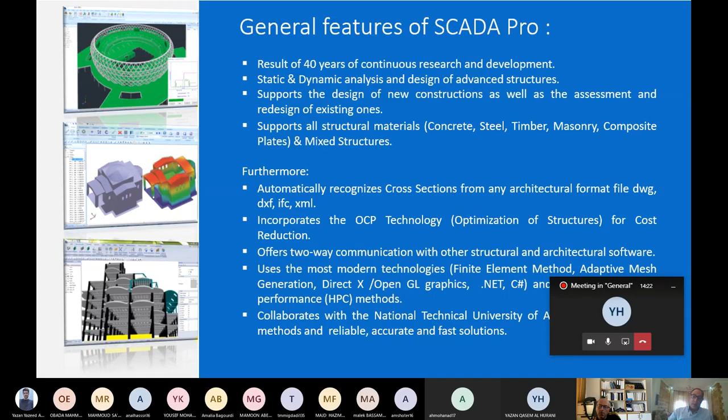It works with DWG and DXF files, incorporates OCP optimization for structure cost reductions, and offers two-way communication with other architectural software using the most modern technologies. Our software has a collaboration with the National Technical University of Athens to create new methods and reliable, accurate, and fast solutions.

Also, it has interoperability with leading applications and standard file types. SCADA Pro integrates BIM technology with two-way communication with any architectural and structural programs.

As you see, Autodesk Revit, ArchiCAD, and programs like AutoCAD, ArchLine, and Arcadia are architecture softwares. Idea Statica is software for steel connection design. As you know, also the structural programs ETABS and SAP.

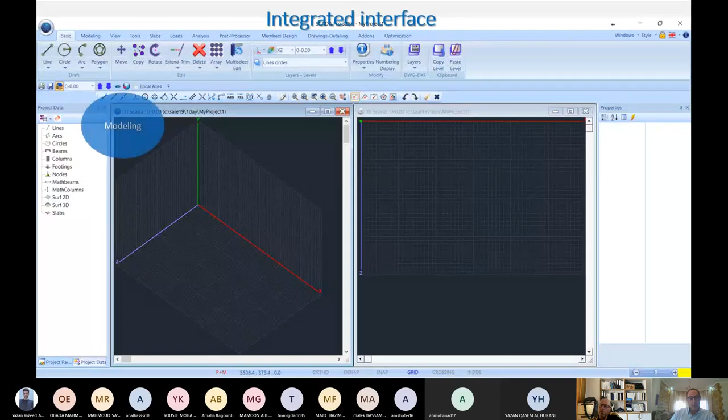You see here, this is the interface of SCADA Pro when you open it. It has different steps that we're going to use to start.

We're going to start from modeling. You can model your structures, your foundations, the elements. You're going to see the loads, static loads, dynamic loads, using different regulations, Eurocodes or each country's regulations and annexations. It also has the Saudi building code. You can do the analysis, which automatically calculates the combinations.

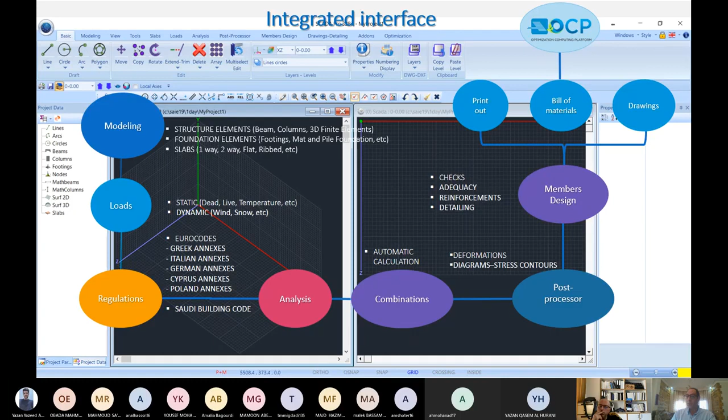In the post-process, we're going to see the deformations and the structural stresses and others. And also in the member design, we'll do the checks, reinforcement, and detailing in the output. You can make the drawings, the bill of materials, and the printouts, and finally we can do the optimization of the structure. It also has an advanced interface.

You can create multiple windows in your interface when you open the program, and these multiple interfaces can give you a direct display of the model on screen, checks, and also give you display and edit of data with tables in front of you.

It also has a powerful graphic library with high resolution virtual display. You can see the whole structure that you have modeled.

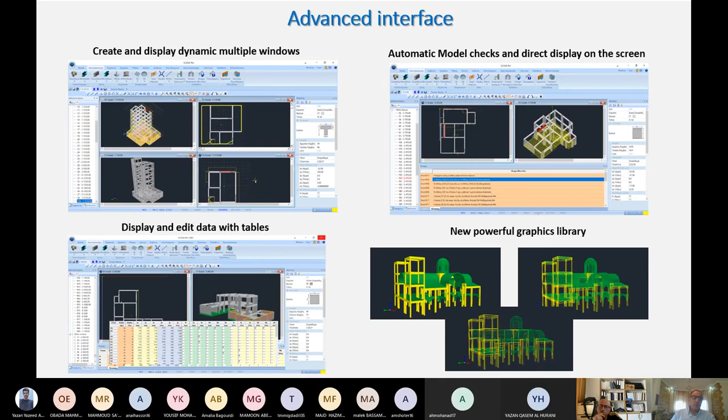Also, SCADA Pro is a multilingual environment which contains 8 languages, which also does the analysis and checks with each country's regulations and annexations, and also provides printouts for the respective languages. It also integrates the Arab regulations, Saudi building codes for concrete, steel, and masonry buildings.

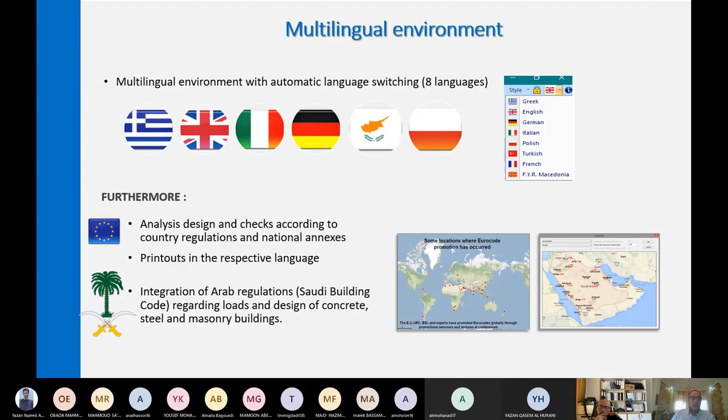Let's see what SCADA Pro enables the user to do and how it makes your life more convenient in the workspace. As we said, it recognizes cross sections for any architectural design, 2D or 3D DXF files.

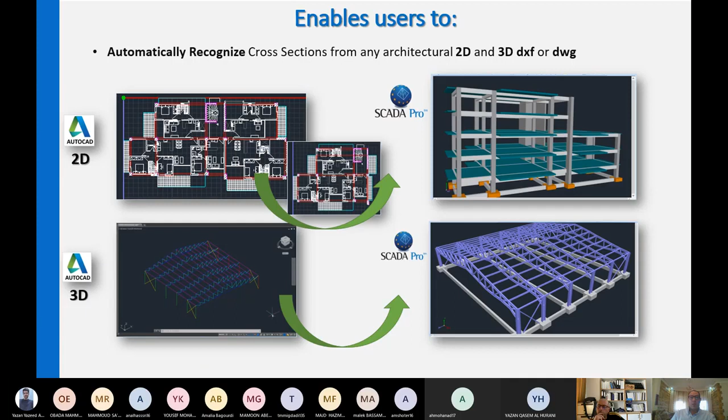We can see here, for example, from AutoCAD a 2D file, you can import it into SCADA Pro manually, or you can import it automatically, which will recognize all the cross sections of the plan and the structure, and will make the models automatically. Also in SCADA Pro, you can see in the 3D view, it will recognize any lines. You can insert it automatically just to apply the cross sections and make the final model of the structure.

It also enables users to automatically convert lines, arcs, and circles into corresponding design objects in SCADA Pro. It automatically creates 3D objects from the outlines of any shapes through front view identification, which helps you create any structure you want.

It also enables bi-directional communication between ETABS and SAP with SCADA Pro. We can import and export concrete, steel, timber, and masonry with the loads and the analysis.

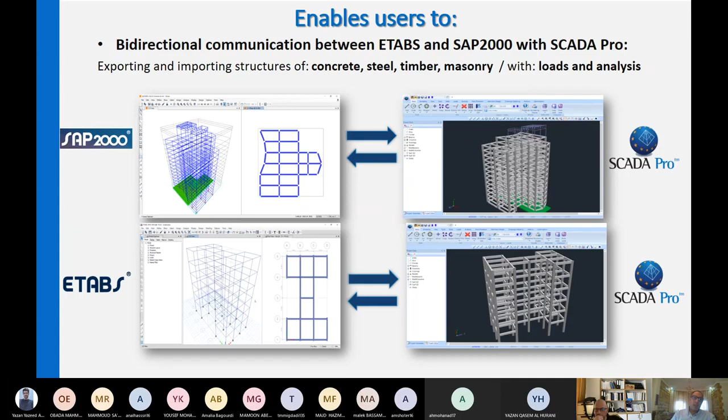For example, here we have a project from SAP, which uses American codes. You can import it into SCADA Pro to use Eurocodes and do the modeling and design of the whole structure. Or you can model and design the structure in SCADA Pro, which has the simplicity and other capabilities, and just do the analysis for American codes in ETABS.

Also, we have bidirectional communication with architectural applications. You can import files from Revit and IFC files from our client that provide accurate data, allowing automatic identification of all components in SCADA Pro, columns, beams, slabs, etc., with their respective properties in order to create the model for analysis and design.

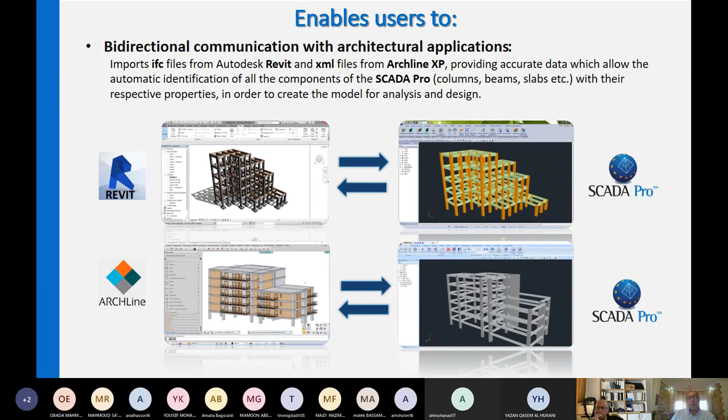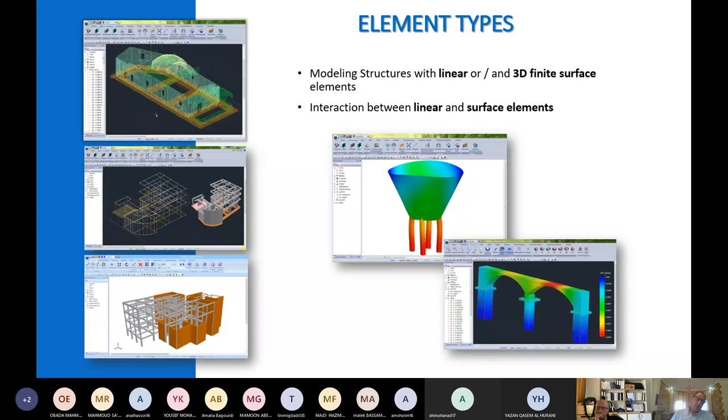Also, we have different elements that the software uses, so you can model structures with linear and 3D finite elements, with interaction also between linear and surface elements. So you have many capabilities in the software.

Also, the types of analysis the software does: we have static analysis, linear static analysis, linear dynamic analysis, and pushover analysis. The professor will explain to you what pushover analysis is. We also have linear time history analysis and non-linear time history analysis according to the Eurocode and Saudi building code.

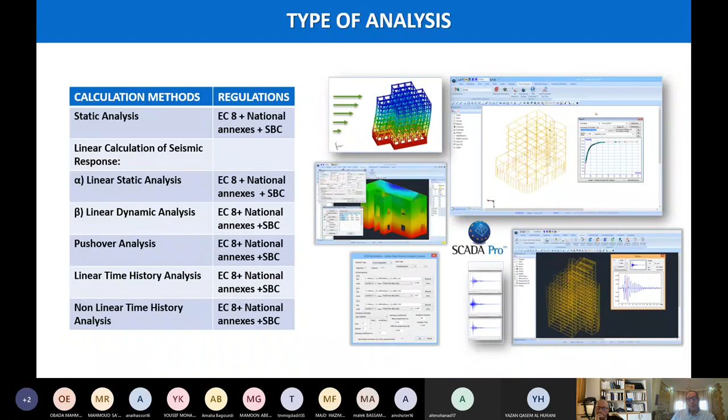Type of materials that you use, we're going to start from materials, starting with concrete. SCADA Pro offers a rich library of standard and arbitrary cross sections, infinite modeling capabilities for beams and columns with arbitrary sections, slabs of any shape and type.

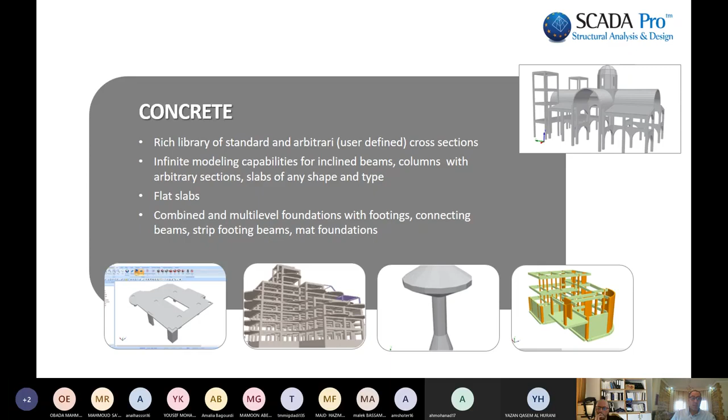Also, you can do flat slabs combined in multi-level foundations with footings, connecting beams, strip footing beams, and mat foundations. So also here, the simplicity of the...

Software gives you unique features, so you can automate the software. It automatically recognizes the thickness of the slabs and automatically designs the whole structure members and displays it.

It also will give you failed design checks, so you can know where the failure is and what is the cause of the failure, and will display the strength ratio in other colors.

For example, for beams, you can see this: we have failure shown in red, pink we have serviceability failure. You can alter that, and in green you can see there's no failure.

Also you can see different indications showing you for the slabs and for the footings. Also among the unique features in design is a powerful reinforcement editor for editing, modification, and 3D display of layers of the reinforcement.

So you can do the reinforcement, automatic bending, shear checking, and moment resistance, with the calculation of moment resistance by the M-N diagrams. So you can do all these, alter them and change them, and see them in 3D view.

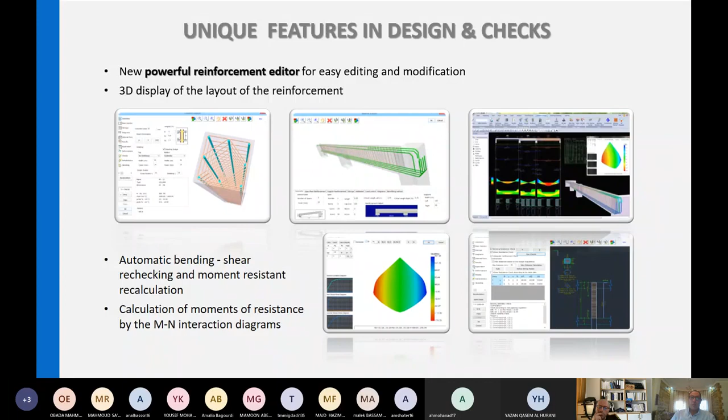And change and alter them, which will make your life simpler to edit and change these things.

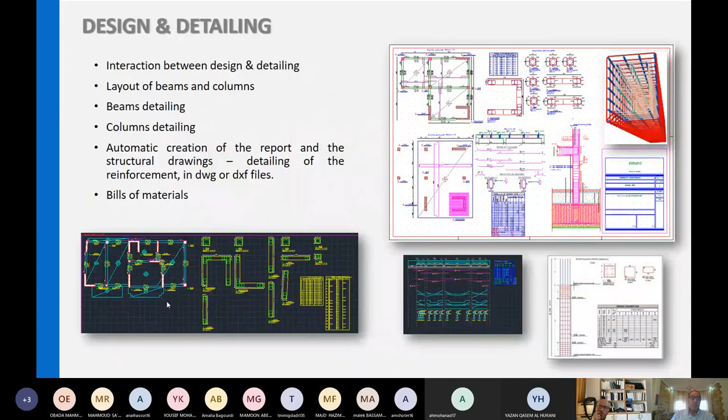Also in design details, it gives layouts of the beams, the columns, beam detailing, column detailing. Also you can create a report for structural drawings and detailing and reinforcements into a DWG file, and it will also give you the bill of materials.

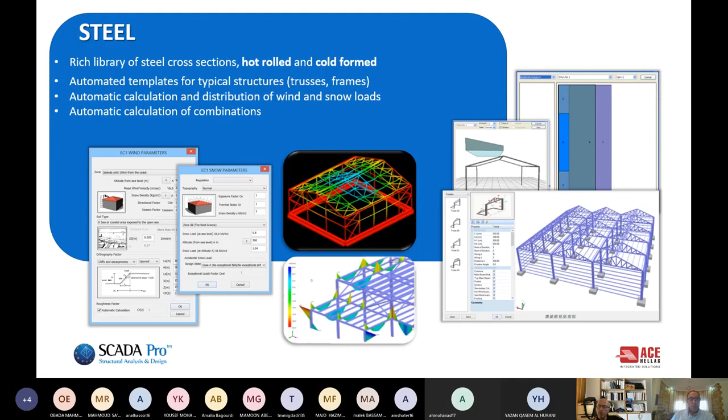For steel, we have a rich library for steel connections, steel sections, hot rolled and cold form, with automatic templates for different typical structures, and it automatically calculates and distributes wind loads and snow loads, and automatically calculates the combinations.

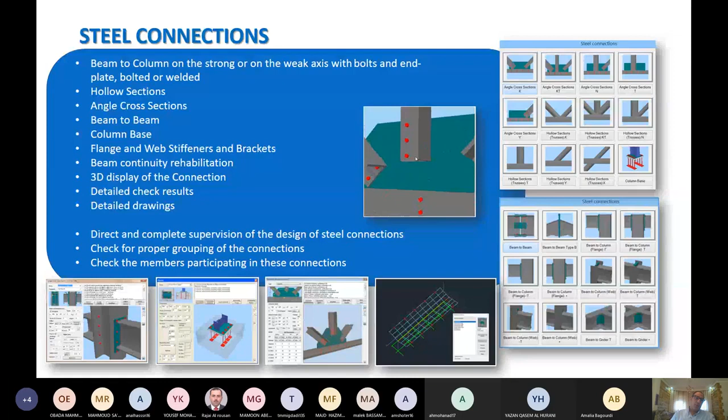You can also see here design checks for the steel member connections, checking structure members for bending, torsion, buckling, all necessary checks for ultimate and serviceability limits, and analysis and design of composite structures, and design for all types of structures.

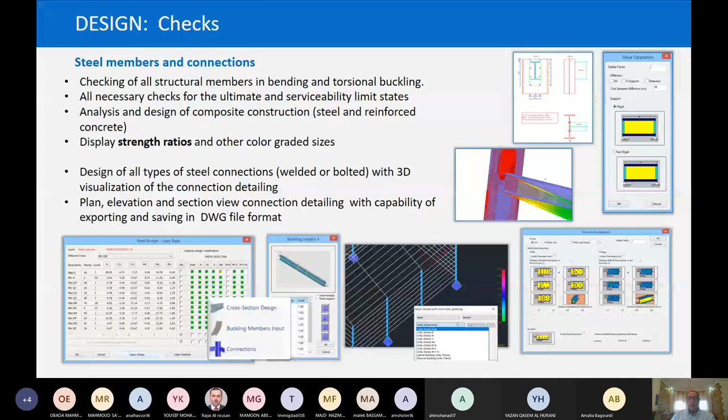And all these you can plan, elevation and section view, with connecting details and the capability of exporting and saving it to a DWG file format.

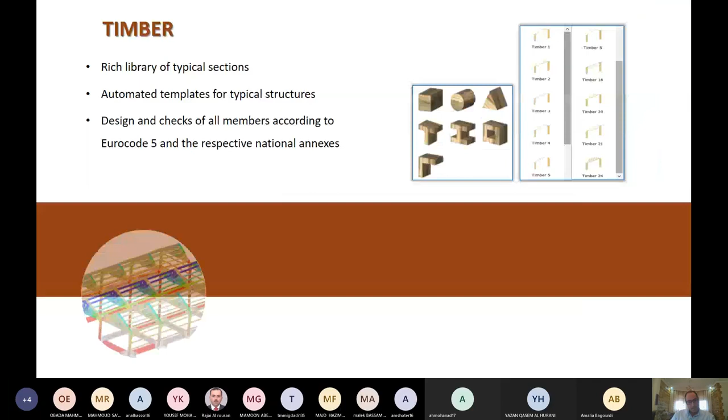Also, we have cold-formed steel sections. Also, for timber, a rich library of typical sections and automated templates, and design checks for all members according to Eurocode 5 and respective national annexes.

Also, timber connections, typical timber connections, and it does the checks for the timber members and connections according to Eurocode 5.

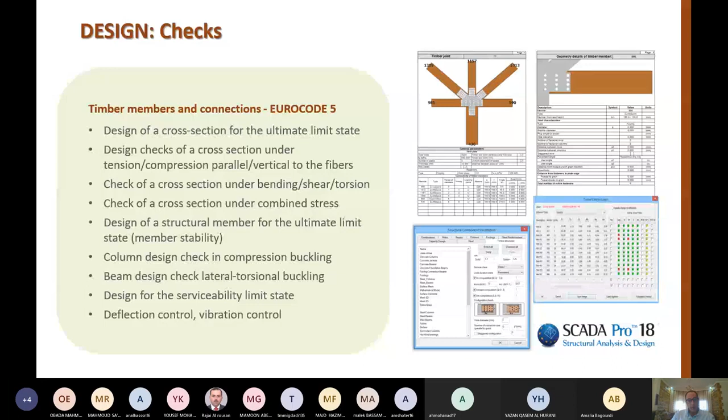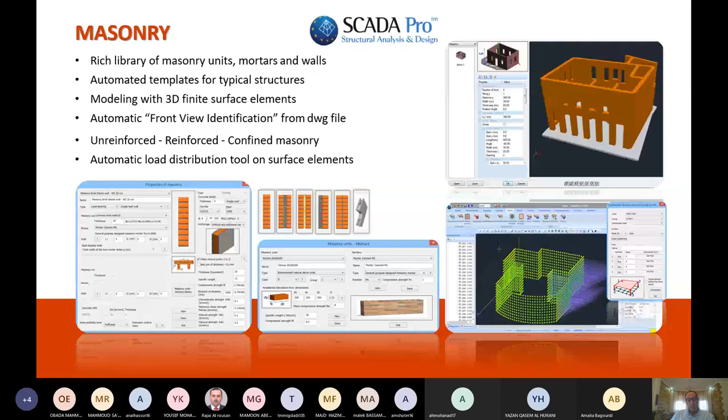Also, we have masonry, a rich library of masonry units, mortars and walls, and automated templates for typical structures, which you can do with 3D finite surface elements, and automatic front view identification from the DWG file. It will also do automatic loads and distribution of forces on the surfaces of these elements, and do the design checks for piers and spandrels of the masonry wall according to Eurocode 6.

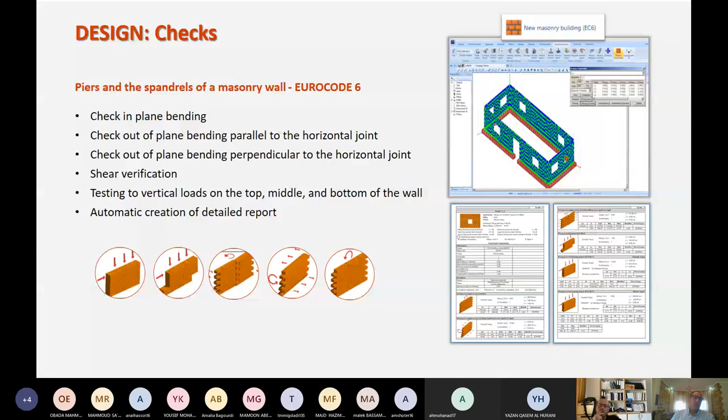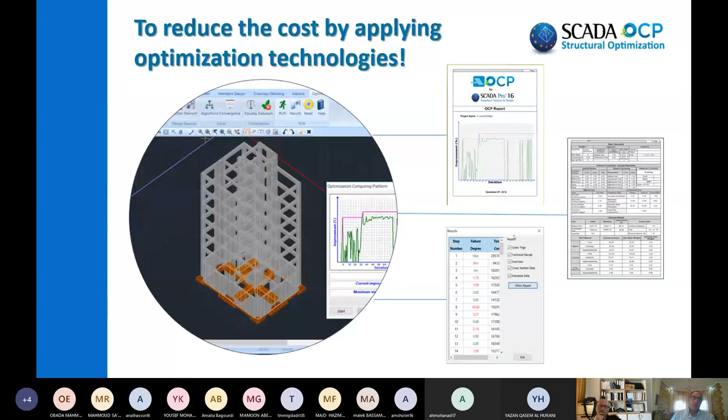And here finally we have the SCADA Pro OCP structural optimization module. It's a module to reduce cost by applying optimization technology.

It's an OCP computing platform that applies optimization theory to real structures, with the ultimate goal to minimize construction costs from materials and labor. This will help you reduce your cost from 10 to 25% in any project, and according with the regulations and codes you're using.

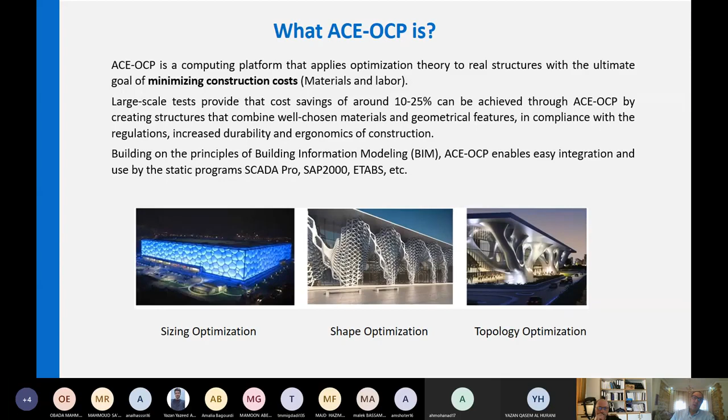Also, it has BIM technology, which is building information modeling, so you can use it with other software like SCADA Pro, or SAP 2000, or ETABS and others.

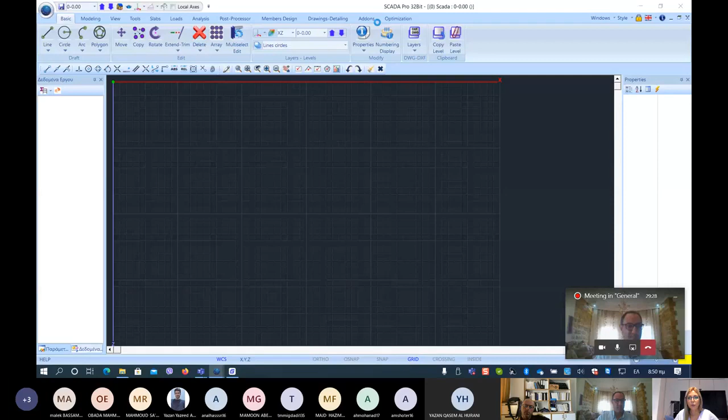I waited a minute to open the software and I will show you what I want all of you to do. I believe that you already have the student license and all of you have the software on your PCs. What I want you to do is right click, and in properties, in compatibility, run this program as administrator. You see, in my computer it's enabled because it's already done. So click this and then apply, and you will use it as administrator. This is important because you will have all the opportunities that the software gives you.

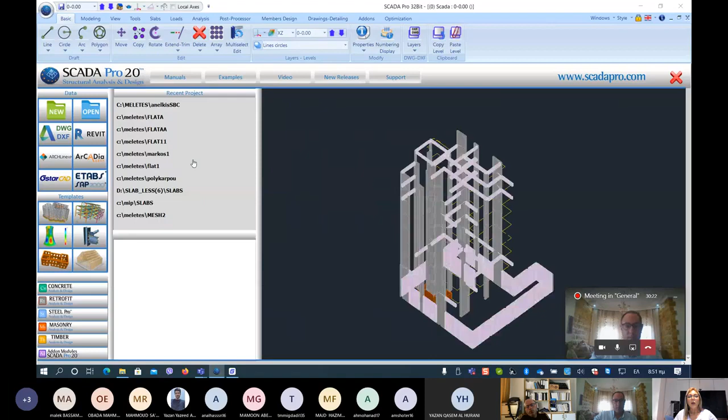So let me go on. Why do I have it two times? Let me start from the beginning. Okay, this is how the software begins.

In the middle of this interface, you see this window. This window gives you a lot of opportunities. Let me explain: this is the first part that we see, and you can click on these tabs in order to start a new project or open an existing project.

You can use this button that we will use together. This is a very important button because you can do the automatic recognition of the structural elements, like Mohammed told you in his good presentation. We will push this button and see what we can do, but let me go on.

Okay, this is a Revit button. This means that if I click on Revit, I can read a Revit file, so an IFC file, and I can import it directly inside the SCADA Pro environment.

ARCHLine.XP is the same thing, I can read an XML file. Arcadia is another architectural software, so I can do the architectural part and then use it directly inside SCADA Pro. GStarCAD is another software like AutoCAD, okay?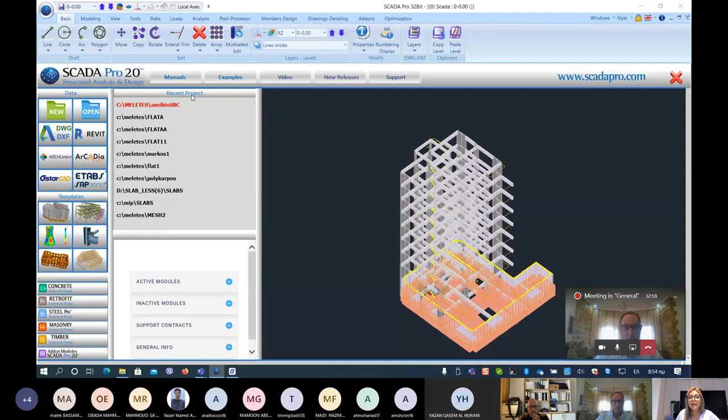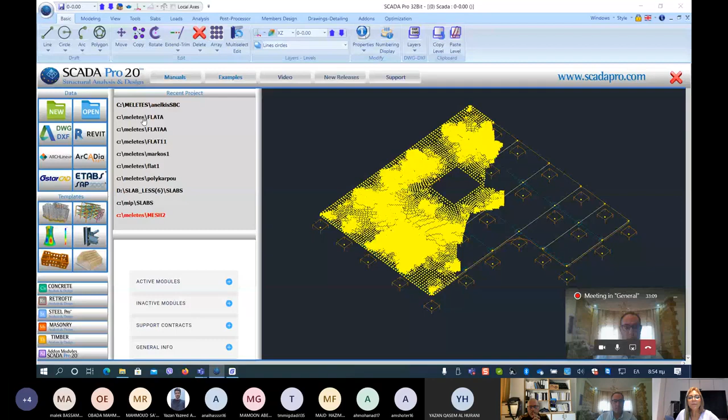Here I can see some recent projects. If I click on this, I can have a preview of the model that is inside this project file, and some details about the modules that you have, what is active and what is not active in your permission.

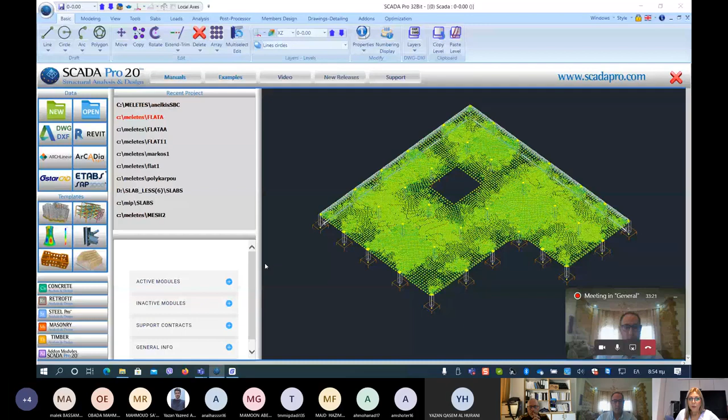Furthermore, if I click manuals, this would be very useful for you. You can see that inside you can find some PDF files that explain and contain the manuals of the software. Each manual has the same name as the tabs you see on top - basic, modeling, view, tools. Inside each one, you can see the explanation of all the commands contained in these tabs.

Inside examples, you will have other PDF files that are entire examples of different projects. We will talk about the first example that contains a new concrete building, and we can see a lot of features of how to complete an entire project. This will be useful for you.

Videos, you have the opportunity to see some videos that can help you have a look at what you can do inside SCADA and how to do it.

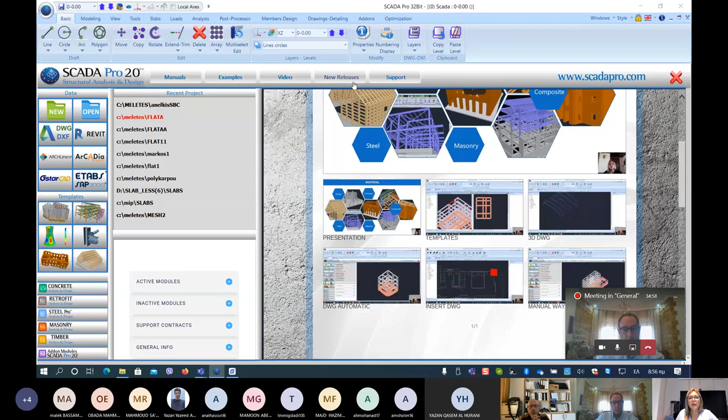So we explained this first window that is very important, but let me tell you something: if you don't close this window, you cannot do anything. I click here and I only hear some bling, so I can't do anything. I need to either close this window or click one button in order to start doing something.

Let me tell you another important tip. I will start with new, no automatic way, nothing ready. I will not use any BIM connection, just new.

So I click new, and here the software tells me please give me the name of the project. So the first thing you have to do always is type a name of a project. I will say that this will be lesson 1.

Let me tell you something - because this is an international software, we have to take care of some rules. Because of the different characters we have in Greek language, in other languages, please use only English, Latin letters in order to type the names. I want you to take care of these details: use only Latin letters and/or numbers, and please do not use any question marks, lines, spaces or specific characters. This is so that we can use this software all around the world, so we have to make some rules.

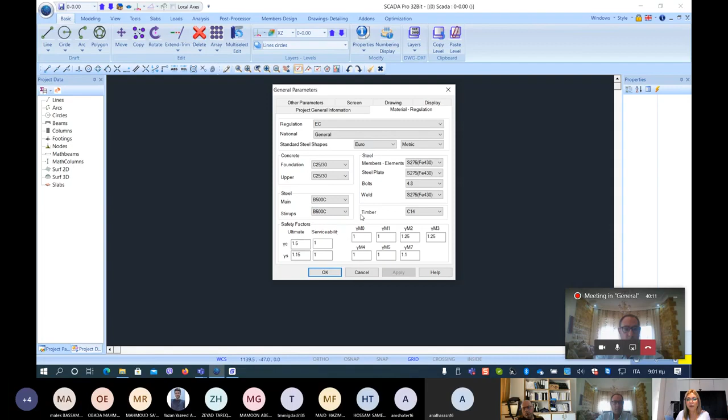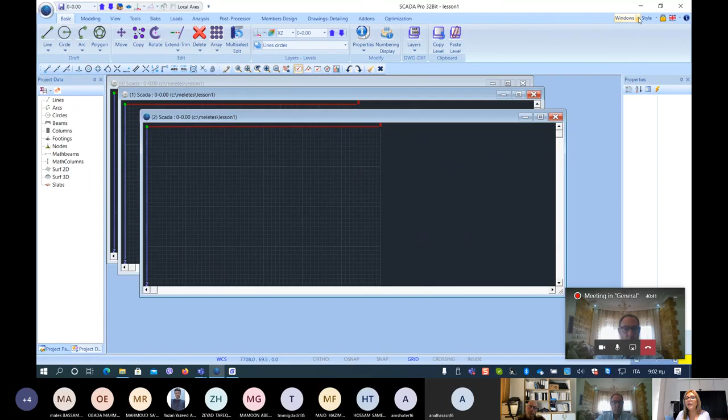I click OK, and now everything starts. You see three windows inside the environment. I can decide to switch off one of them and keep one, or I can decide to create more windows like this, and then decide how to dispose all these windows.

Why do we have all these windows? Because you can see the 2D view, the 3D view, and maybe the virtual view, and maybe you have two screens, so you can move one of them to the other screen. The most important thing is that everything you do in one window, you can see it in each one. Also, you can start in one window and continue in the other. We will see all these things while we work on SCADA.

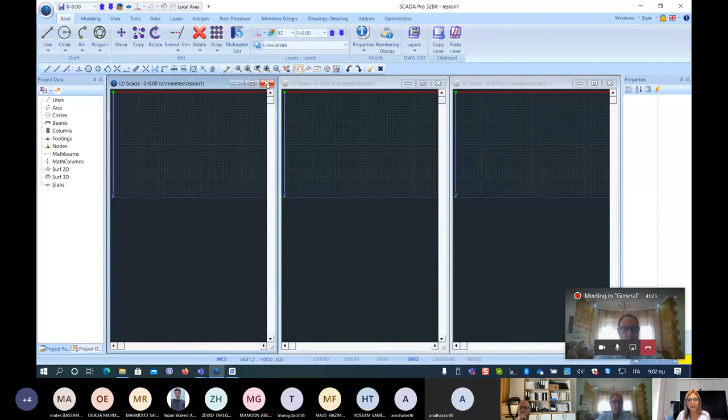So let me start with one window. Here we are in the 2D view. You see something maybe a little strange: the 2D view is the XZ axis, and the Y-axis is the vertical one. This is not something you can change. You will use XZ for the floor plan, and Y will be the height.

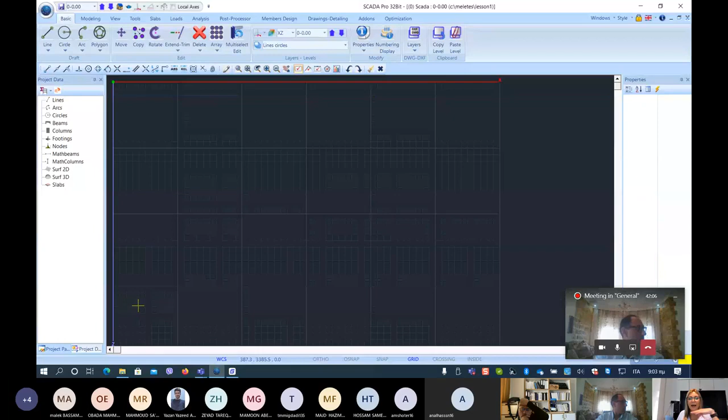So in this environment, let's start to explain these tabs. We will start with the basic one. Here you can find some commands that are very common with CAD software: draw a line, a circle, arc, move, copy, rotate, extend and trim, delete. You see a lot of architectural commands, and this is what they are.

They are architectural commands. Here you can see layers, something very common also in CAD software, and the levels. Let me explain this. You see that I am in 0 level, so the first window is 0 level. What is really important to understand from the beginning is that 0 level is the foundation level. Let me explain when the level that you put—okay, that the foundation is this one.

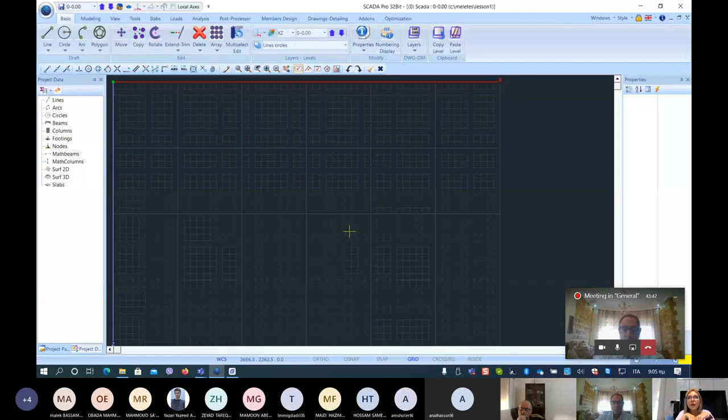So maybe you have a construction that has like 2 or 3 foundations. There are some big buildings that have a lot of foundations. But don't worry, this will be the first bottom foundation. This means the first level will be the second foundation, then the third foundation, and then the levels start.

So we start with 0, and we can create other levels. How do we do this? We click here, and now I can create—this is the level management—and I create a lot of levels. I can say, for example, directly put 'add', and as you see, I made a lot of levels. After doing this, I can use the arrows to go up or down.

Another good thing to say is that if I go away from this tab and open the modeling tab, I'm not sure what level I'm working in. This is why, as you see here, I created my own line of commands so I don't need to look inside the tabs to find commands I use very commonly. So how can you do this?

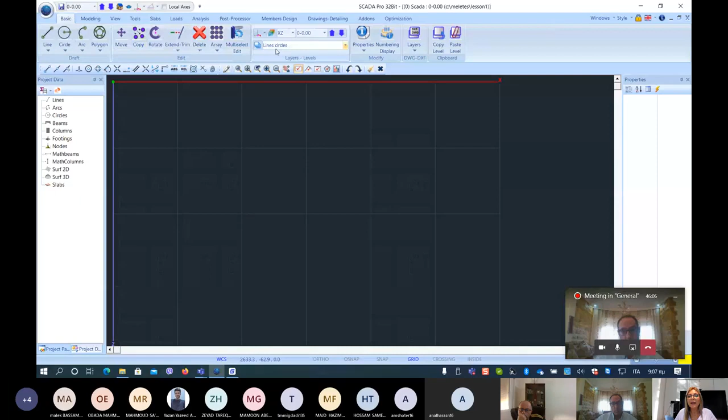For example, I can remove some other commands that I have here. I put the level numbering and the arrows in order to go up and down. I will tell you what are the most useful commands, and I will explain why you need to create your own command bars.

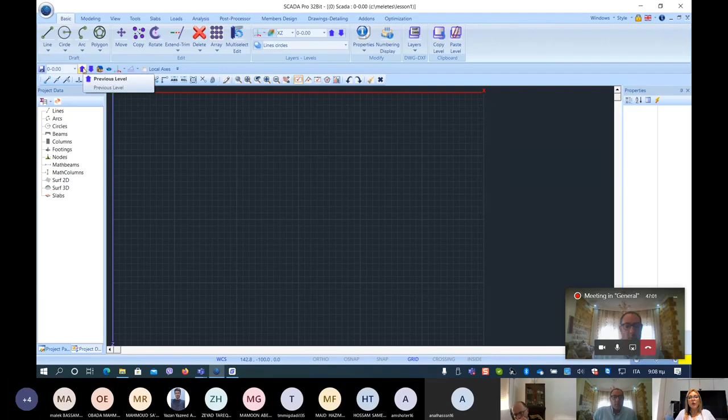And another thing is that I can customize this—not minimize, I'm sorry—I can come here and show below the ribbon. This is where I prefer to have my toolbar, because it's more useful when I use the mouse. So here I can be in modeling and go upstairs and downstairs without entering each time inside basic.

Let me finish with this part. Here we can see some properties, numbering—it's not very useful now, we will use it after we put something inside. DWG and DXF file here, meaning it has something to do with the drawing file that I could insert inside. So we will talk about this.

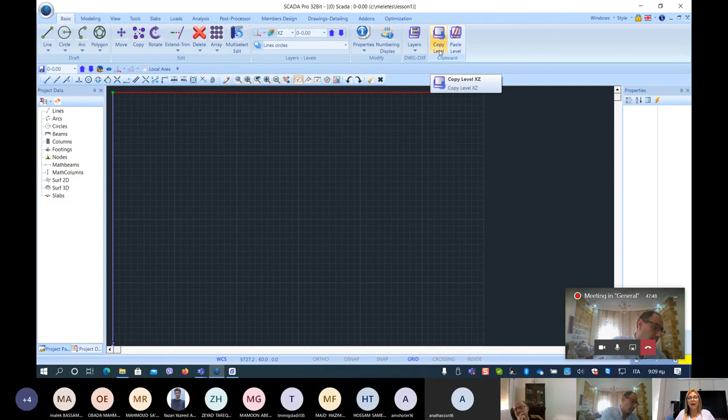And then copy level and paste level, very useful, because I can model something inside a level, and then copy and paste it to another level in order to save time.

Modeling is a very important tab, because it gives me the opportunity to model each structural element that I need for my project. We start with columns—you see there are concrete columns, steel columns, and inside steel there are also wood columns. What I want you to realize is that inside this software and environment, you can find all kinds of materials: steel, concrete, masonry, timber. All the commands are common for each material. This is very useful, because when you learn something, you don't need to unlearn and learn something else for a different material.

Nice footings here. Foundation and surface elements are very important. Mohammed showed you that you can use linear elements and surface elements.

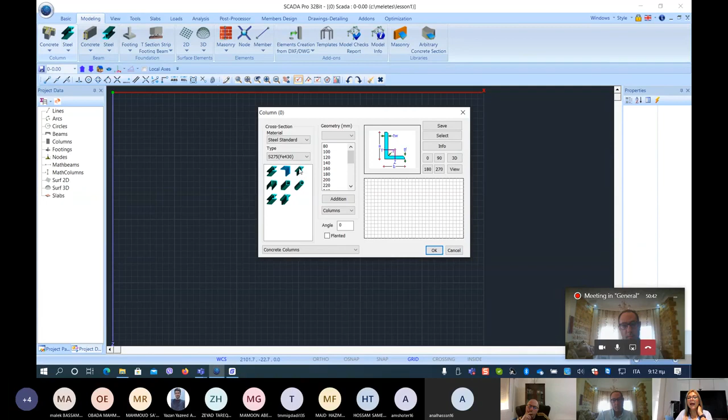And even here you see concrete, but let me show you - if I select, for example, timber, I will find here the timber sections. If I select steel, I will find the steel sections. And what are these? These are libraries, okay? Libraries of sections. So about the steel, you see there are some libraries.

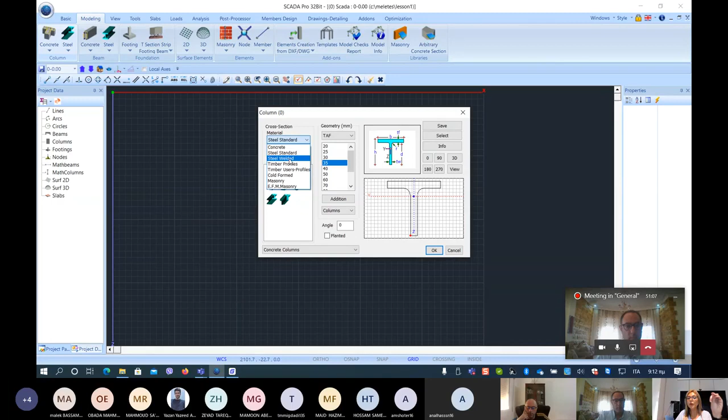These are precise - you cannot create them, you can only decide the dimension of them, because they come from Eurocode, for Eurocode 3. So these are the sections that Eurocodes use. And this is the same thing about timber profiles - these are the profiles that Eurocode uses.

And what about concrete? Concrete gives me bigger opportunity. So I can select, for example, the geometry, the type, but then I can decide the geometry. How can I do this? You see here the design and you type the numbers. Very, very important to realize that all the dimensions are in centimeters.

So let me type, for example, 100 centimeters in by - the Z, you see, this is the one - so let me type 30 centimeters, another 30 centimeters, and then for this part let me type, for example, 120 centimeters. You see that you design this here, and you can also see it in the 3D view, and you can realize the local axes.

So these are the global axes, and you will see them inside SCADA with the big letters. I don't remember how we can call them - the big letters, and these will be with the small letters.

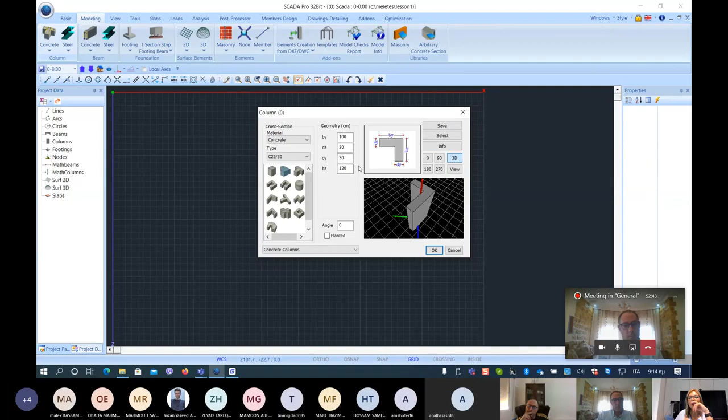So if I now click OK - no, let me show you another thing. Here you see there are some points, and I can choose these points, and these are the insert points. I can also change the direction of the section. So let me click this insert point.

Also, please note that I told you there are layers, and here you see these are the SCADA Pro layers. These are the structural layers, and you see that automatically the software inserts all the elements I decide to insert into the right layer.

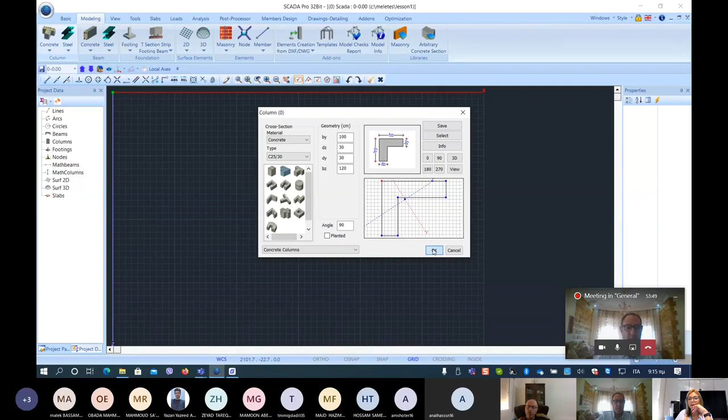Okay Muhammad, is there any problem? Okay, I'll go on. So I click here, I click OK, and now here I see this section.

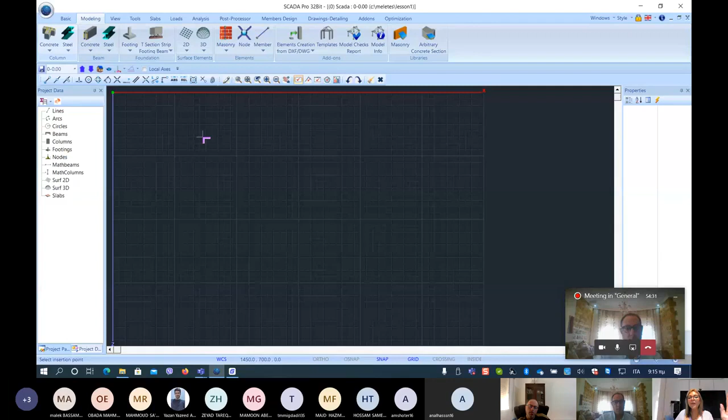I can just left click and leave it there, or I can select some snaps. We all know about snaps. I can, for example, snap to grid - so what I mean by snap to grid, you see I click and I click the grid, so I can insert this on the grid. The grid is 100 per 100. We can change it, I can show you, but as default these squares are 100 per 100.

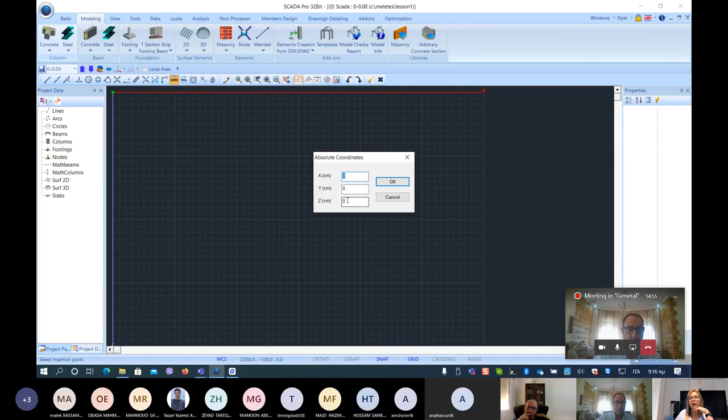So I can click and leave it here, or I can use the absolute or the relative coordinates. From the absolute coordinates, I click 0,0,0, or I can say, for example, 0, and let's show you 100, and I click OK, and you see, let me go near, that this is 100, and this is where the software inserts this section.

I can go on by inserting the same section. You see, I click and I still have this section on my mouse. If I don't want to have this section anymore, I just right click. So I think it's easy to understand how to insert sections.

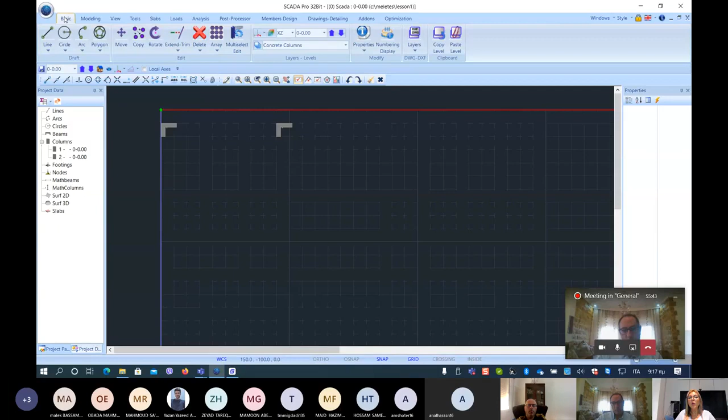Then when I insert these two of them, I can go on basic and work like in CAD - so, copy. I can use, here are the snaps, you see, absolute relative coordinates, and here are the selection opportunities. So the window gives me the opportunity to select all by window.

Then you see here on the bottom, I have some commands that help me realize what I need to do later. It says select objects and right click. So I right click and then it tells me give the characteristic point, and I give this characteristic point, then the position point, and now I have 4 sections of columns. But let's see another thing.

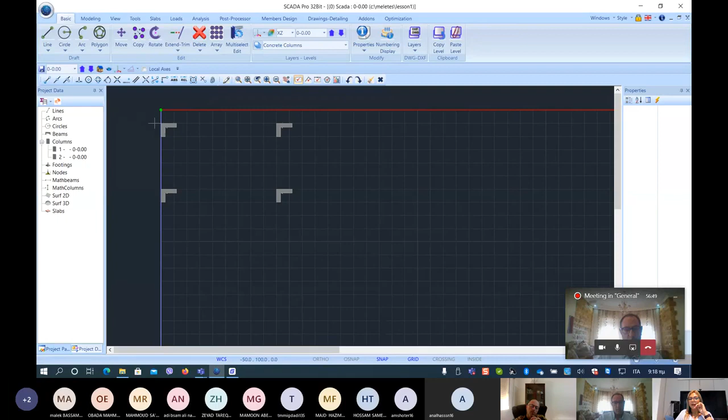I switch off the snap, I don't need it anymore, and I go on this element. I click on this element and look what happens. In the left part I see a tree, we'll call it tree. So I see that inside the columns group I have this element, I click here and I have this one. Now I can refresh, open, and see that there are 4 columns, and here is the other one. I can see in the right part the properties.

You see this is a concrete material section. This is the type of the section and the type of material, and here you have the geometry, and the most important thing is that you can change everything here.

So I can, for example, say that this would be 130, and you see this changed. If I want to change all the characteristics of this element, I can go here on more, which opens again the inserting window. It gives me the opportunity to change even the section. So I click OK, and I can change also the section.

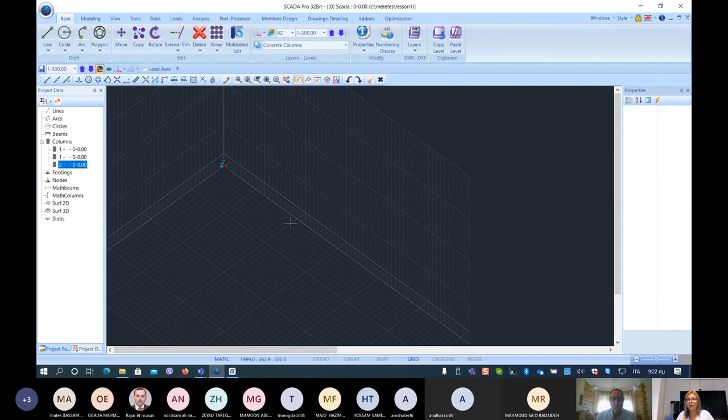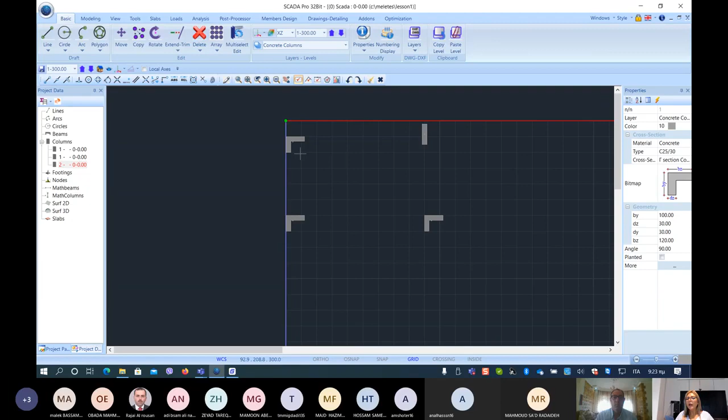That was a preview of what I'm going to show you now. So I am in the first floor, and let me put some beams, concrete beams. I select the simple one, 30 by 60. It goes directly into the concrete beams, and I click OK, and I want you to see something.

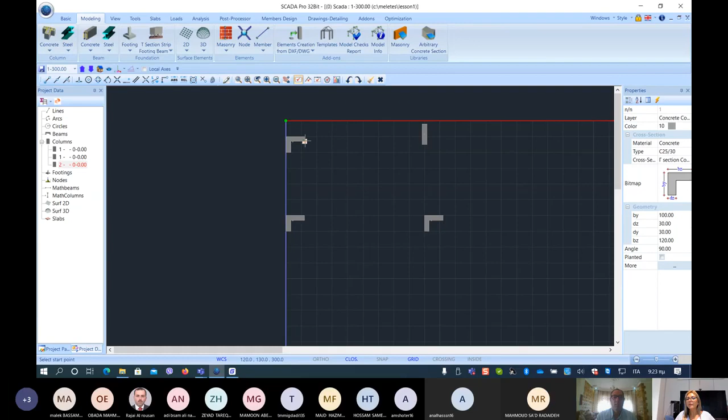I select the snap, the most common is the nearest one. So I click here, and I can start from a lot of points. Let me start from here. You see, I start from here, but it gives me the insert point of the beam to be the center one. I can click tab, just click tab on my PC, and you see I can change the position. Okay, so I need here.

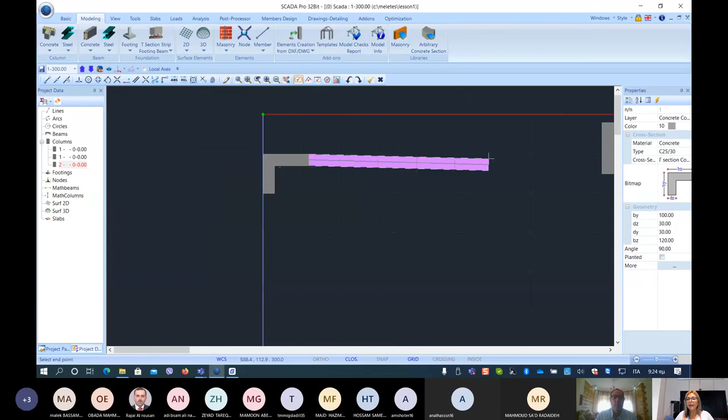Then I can go to some place, let's put it here. And then I can start from here, and let's decide to put it here. From here, tab, I put it here, so I can do whatever I want. This is only to show you something. So I have this combination of beams and columns.

And now, if I go downstairs, you remember I have only the columns. Here I have beams and columns. And let me do the step that I told you, because this is important to understand what the linear elements are. I go here in Tools.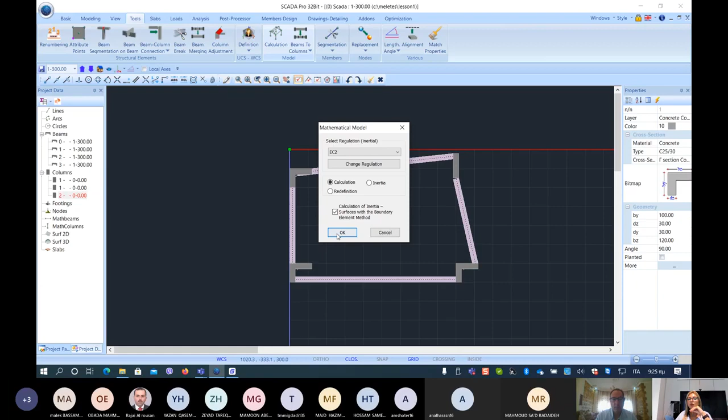I see the new tab that we didn't see previously. But I tell you that this is the most important command, because this is the calculation of the mathematical model, which gives me the inertial characteristics. So I click OK, and let me explain what happened here.

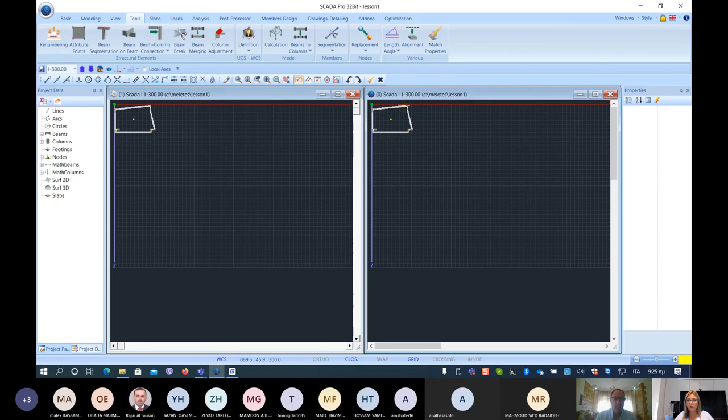Okay, now I have the opportunity, let me open another window, vertical. So I click, you see if this is blue and this is gray, so this is the active window, or I put my mouse here and you see this is blue and this is gray, so this is the active window.

So I decide to see this in 3D view. Here is the 2D, here is the 3D, and you see now not the sections, you see some kind of lines with some kind of other lines, smaller in the beginning and at the end.

But this is a very important point, and this is where I think we can focus, because now if I click here, I see in the properties, let me make it a little bit bigger, okay, I see that yes, the cross section is a concrete beam, but the most important thing is that now this concrete beam has moments of inertia and has all the mathematical characteristics of the concrete beam.

Also, I see a group that we call rigid offsets, and you see the X, the Y, the Z, okay, and these are the rigid offsets. So let me explain you what these rigid offsets are.

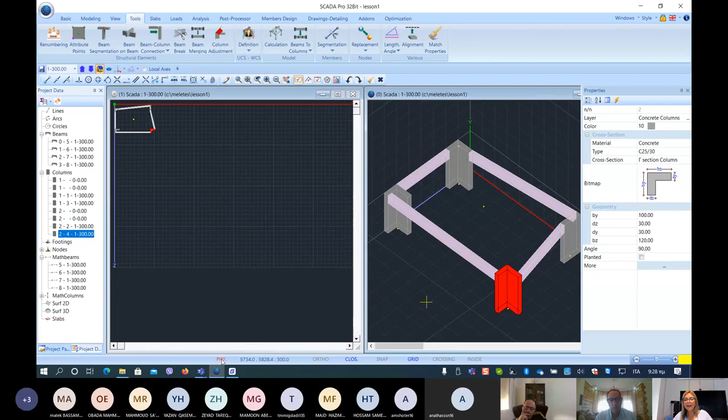I click here again so I can see the mathematical and the physical again. So look inside. This is the beam and this is the column.

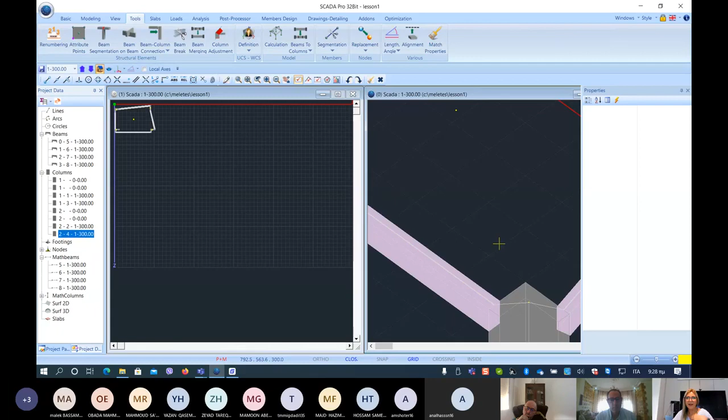When I need to realize this in real time, I need to insert a beam, and then I will set the reinforcement and the material of the beam here that I found in the column. But the column has this node that is the geometrical point of this section.

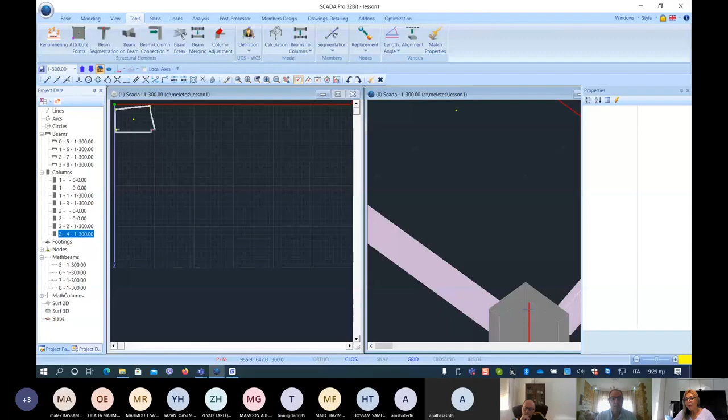So if I don't have this rigid offset, what will happen? This concrete part will arrive until this node, meaning that I will have more beam, a bigger beam, okay, and a bigger reinforcement. That means that even in the counting of material it will be not right, and also in the design of the reinforcement it will be not right.

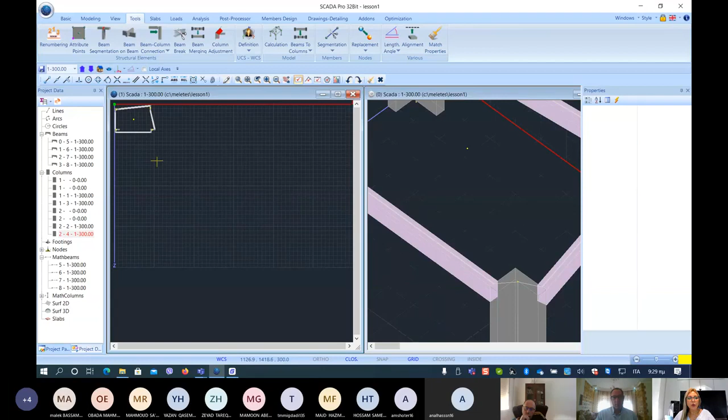So that's why the software automatically inserts this rigid offset. Let me show you this also in the 2D. Let me show you what happens if I decide to make this rigid offset zero. You see, I have the beam here, but the mathematical element of the beam is here.

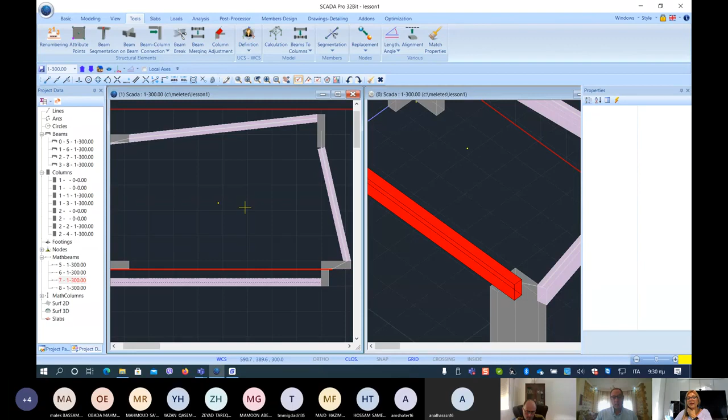So what is really important to understand is that with SCADA Pro, you have the opportunity to have the rigid offsets automatically. If some of you used to work with SAP, for example, this is something the user needs to do manually, going in and figuring out the DX, and writing the number in order to combine the mathematical model with the structural element.

The last thing I want you to see for this first lesson, this first contact with SCADA Pro, is that after we create the mathematical model, we see nodes inside. So we see here vertical elements that are the columns. I see a line, okay, a linear element with 2 nodes, one node and a second node.

And these are the nodes that make the connection with the other elements, okay? So that's why we call them linear elements, okay?

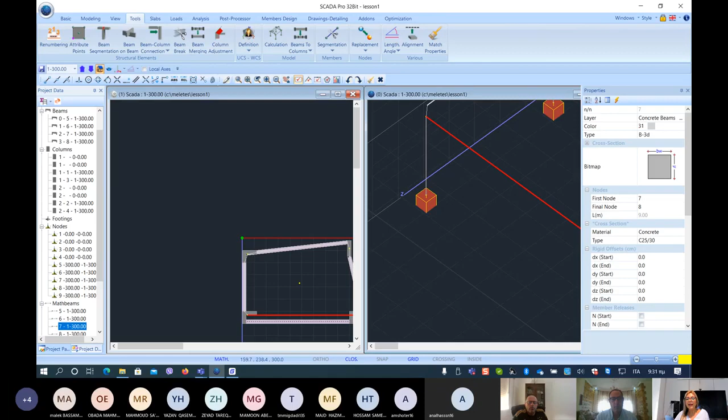Another thing that you see here in the middle of the floor plan, you see another node. This is the master node. What is the master node? The master node is a node that gives me the idea of the slab. So let me explain you.

When you have a slab here, okay, means that the nodes that are around this slab are in some kind depending, okay, in the deformation and the movement of the slab are dependent on this, depending on the slab. So this master node gives me this function, okay.

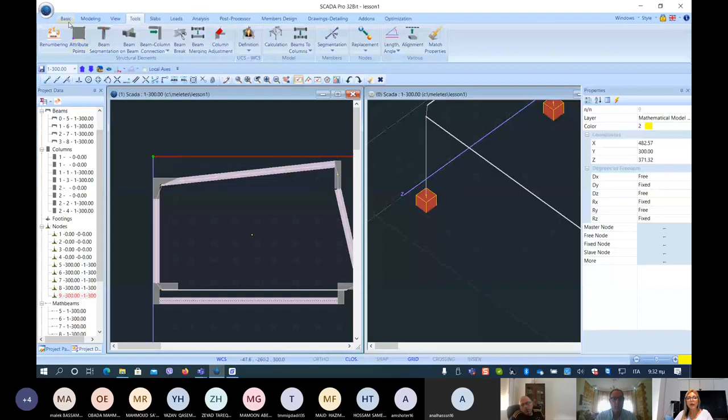And how can I see this master node? I see it here. When I create the floor plans, you see that there is a light, and this light is switched on, and this is the rigid link constraint. So the master node gives me the rigid link constraint, meaning that in the foundation floor I don't have this, but in all the other floors I have this rigid link constraint because the program realizes that in common structures you have slabs.

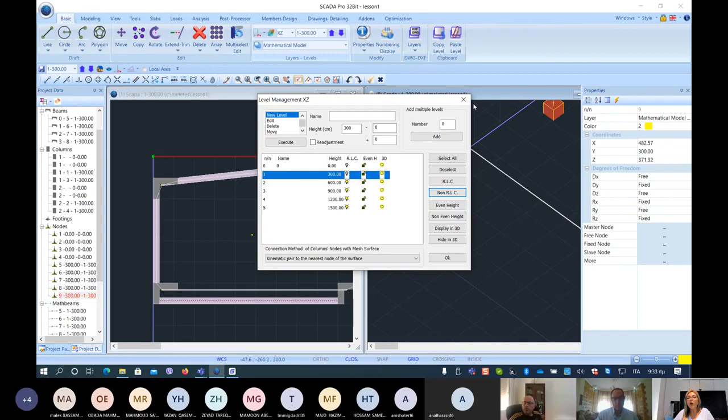If you don't want this, you can even decide not to have the rigid link constraint, okay, or you can just delete the node. But before I do this, I want you to realize that this is node number 9. So let me show you what it means to have this node.

This means that all the nodes around this floor plan will be slaved from this node in the dx and dz direction and in the rotations. So this means in this floor plan there is a condition, okay?

If I delete this, did it? I delete this, okay? And now I click on this node, I see that this is free, the degrees of freedom of this node are free.

For me, the most important thing for the first lesson is to understand a little bit what it means by structural elements: what a column is, a beam is, how they can be connected between them, how they can be slaved one from the other, okay? What means the floor plans, okay?

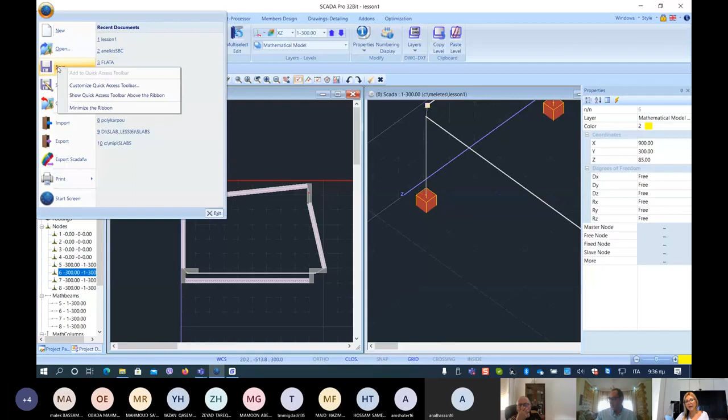So what we can do in order to close, to finish this project, I click save. Where I found this one, I found it here. So what I did, I click and I add it in my toolbar. So I have it here. Very important, so please do this, because it's very important to save, especially when you are a new one. So I save it, no?

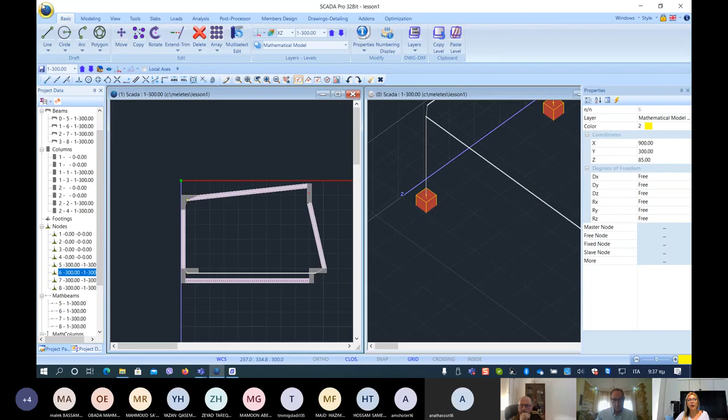And now I can close the software, or I can just close the project. If I close the project, I see the environment without the project, but then if I want to take it again, I can just select it. So here I am. Okay, I switch off my screen, I will try to do this.

It's okay. Now you don't see my screen anymore, is that right? Okay.

Can I have some minutes? I would like, if some of you want to ask me something for this first lesson. Okay, two meanings: either this lesson was perfect, or you didn't understand anything. I hope it's the first one.